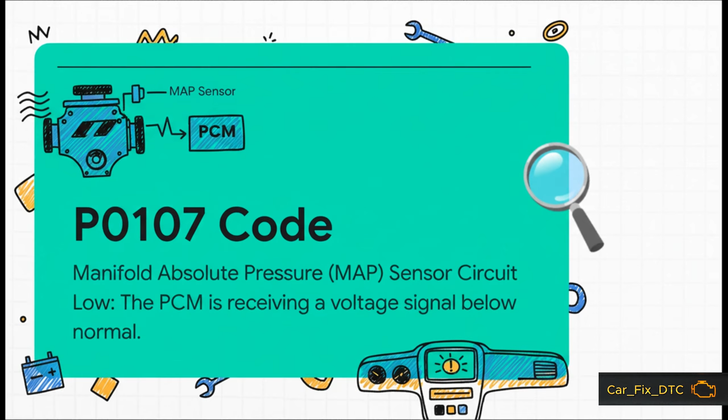The absolute best way to picture the MAP sensor is to think of it as your engine's lungs. Seriously, it measures the air pressure inside the engine's intake to tell the computer exactly how much of a breath the engine is taking in. And that information is absolutely critical for the computer to figure out the perfect amount of fuel to add for a clean, powerful combustion.

Now this is where things can get a little confusing, so let's clear something up. You've probably also heard of a MAF, or mass airflow sensor. They both measure air, but they do it differently. The MAP sensor measures pressure, while the MAF sensor measures the volume of air. Now here's the key: your car might have one or the other, or sometimes even both. But for our code P0107, our focus is 100% on that MAP sensor.

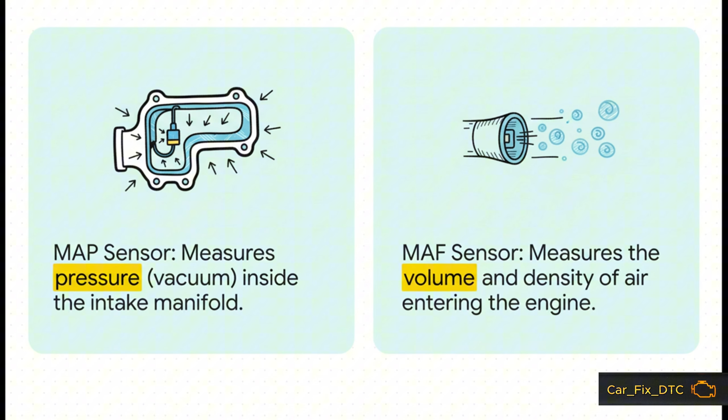Okay, so we know what the code means. Now let's play detective and figure out what's actually causing it. It's time to investigate the usual suspects behind a P0107.

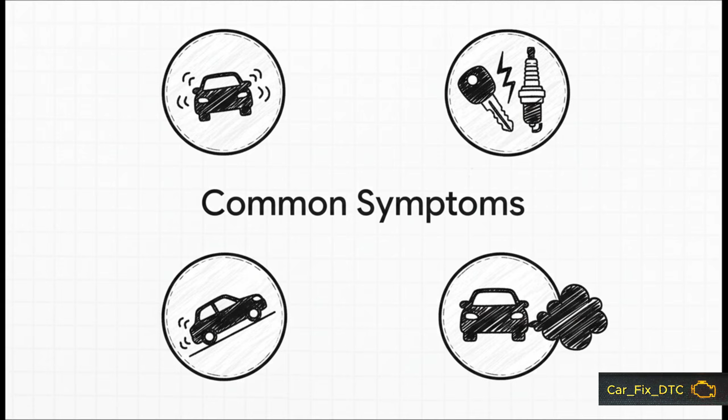So aside from that annoying light, you're probably feeling some real issues with how your car is driving. Because the computer is getting garbage data, it can't run the engine right. That's why you might have a really rough idle, or the engine might even stall. It might be tough to start, feel super sluggish when you step on the gas, and you might even see black smoke coming out of the tailpipe. That smoke, that's a classic sign the computer is just guessing and dumping way too much fuel in.

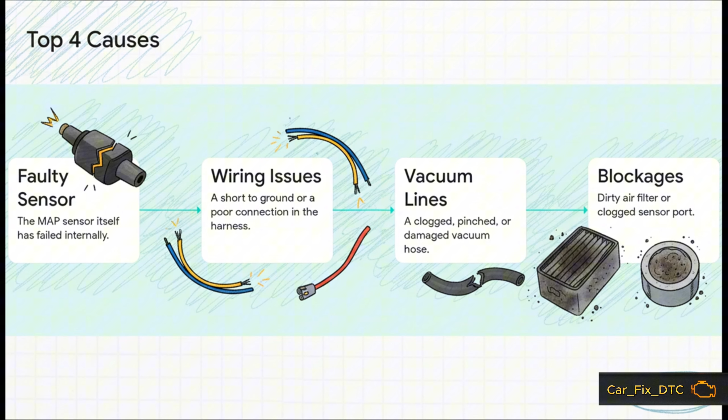So, what's the root of the problem? Well, a lot of the time, the MAP sensor itself has just given up the ghost. It's the most common culprit. But, and this is important, before you run out and buy a new one, you have to check other things first. It could easily be a wiring issue, like a wire rubbing and shorting out, or it could be a cracked vacuum hose that connects to the sensor. It could even be something as simple as a completely clogged up air filter.

And that leads us to the most important part: what do you do about it? We're going to lay out a simple, clear action plan. This is how you go from a confusing code to total clarity and a real solution.

Okay, you've got the code, you know the possible causes, but where do you actually begin the real diagnostic work? You start with a logical process. Don't just start replacing parts. First, always check if there are any other trouble codes stored. They can give you some amazing clues.

Next, do a really good visual inspection. You'd be surprised what you can find just by looking. After that, if you have a scan tool, you can watch the live data from the sensor. And finally, if you're still stumped, you can get out a multimeter and test the wiring itself.

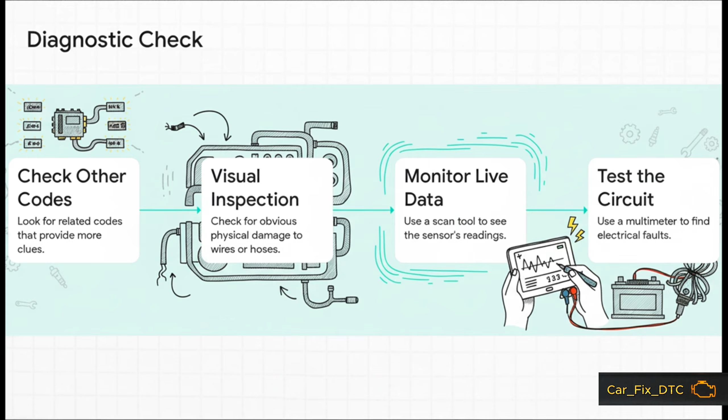That visual inspection is your secret weapon, I'm telling you. First, you got to find the MAP sensor. It's almost always bolted right onto the engine's intake manifold. Get a good light in there and look closely at the vacuum hose going to it. Is it cracked? Kinked? Then check out the electrical plug.

Are the pins clean and straight? And then just trace the wires coming off it as far as you can. See any spots where the insulation is rubbed off? That could be your problem right there.

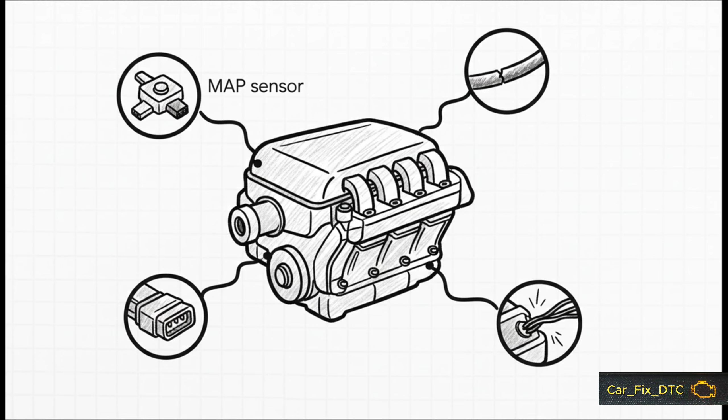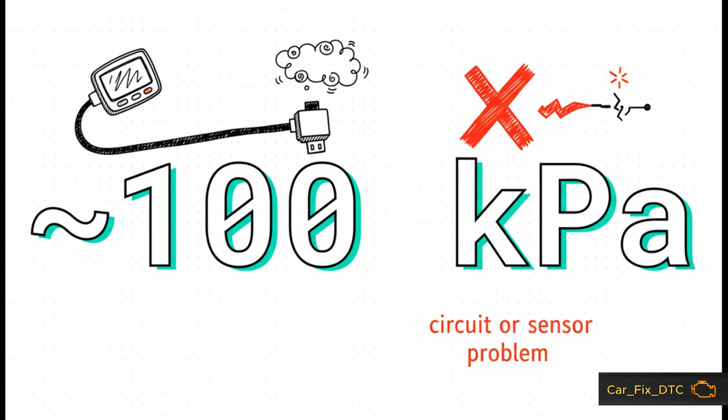All right, if you've got a scan tool, this is where it becomes your best friend. Plug it in, turn the key to the on position, but don't start the engine. Look for the MAP sensor data. It should be reading your local atmospheric pressure, which is right around 100 kilopascals at sea level. If you see a number that's super low, like close to 0, that is a massive red flag that something is wrong with the sensor or its circuit.

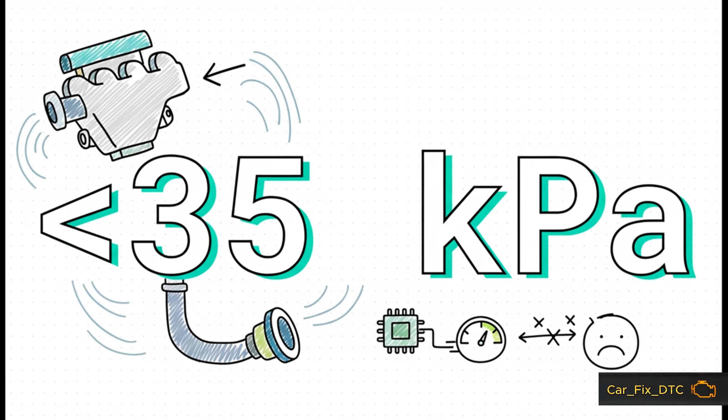Okay, now go ahead and start the engine. The second it's running, the engine creates a vacuum, and that reading on your scan tool should drop like a rock, way down, usually under 35 kilopascal. If that number doesn't change at all or it's stuck high or low, well, you've just confirmed the computer isn't seeing the right signal. You're getting super close to the answer.

So, after a little detective work, you've hopefully found the culprit. Let's talk about the final, most satisfying step, making the fix and clearing that code for good.

The repair should always match the problem you found. Simple, right? If you found a broken wire, you fix the wire. If you found a vacuum line clogged with gunk, you clean it out. And if all your tests point to a bad sensor, well, then it's finally time to replace it.

But you're not done yet. The last step is absolutely crucial. Use your scanner to clear the code and then take the car for a good test drive to make sure the light stays off and the problem is really solved.

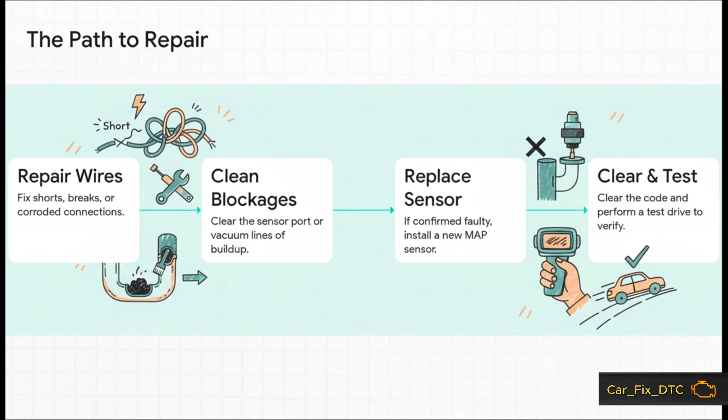So here's the biggest thing I want you to take away from all this. A P0107 code can feel like a disaster, but it's not. It's just a clue. It's your car literally pointing you in the right direction and saying, hey, the problem is over here, come look at this system. You've just turned a stressful warning light into a totally manageable puzzle. So, now that you have the roadmap, what's your next move?